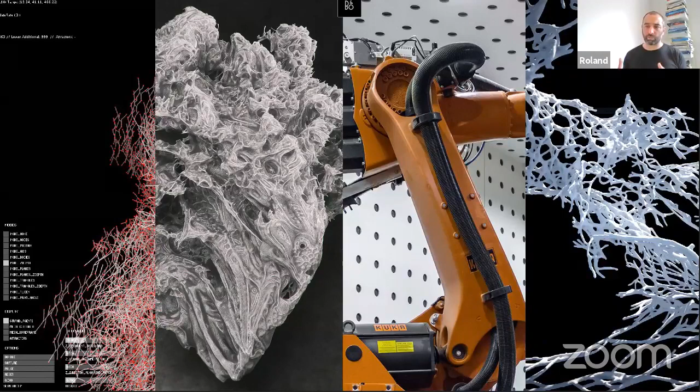The third thing I'm going to discuss is advanced manufacturing, specifically around robotics and the way we're using robotics in order to build some of the more complex geometries we've been working on. And lastly, looking at tectonics. What I'll be doing today is going through a whole series of projects that describe an evolution of tectonics. And when I'm talking about tectonics, what I'm talking about is a relationship between structure, surface, ornament, and their constructional logic, where all these things are intertwined.

So I've developed this work over a number of different modes of practice. The first of these, Kokkugia, we founded in 2004, and this was with two partners, Jonathan Podborsek and Rob Stuart-Smith. Kokkugia was really set up to explore algorithmic processes and try to understand how complex systems could be applied to architecture, and what that means for aesthetics and for articulation. This practice ran for about 10 years, and it was very much about doing highly speculative research.

The second mode of practice began in 2012, when I moved from the US back to Australia and established a laboratory at RMIT University, which is now called the Tectonic Formation Lab. This was really looking at the way we could use robots in order to build some of the complex geometries we've been working on. I guess at this point in our research, we realized that the things we were designing weren't possible to build in the current construction paradigm. And so consequently, we needed to explore other ways of building.

And so we've looked primarily at robots for that. And then lastly is Studio Roland Snooks, which is, I guess, in some ways a more traditional architecture practice. This is a practice which is trying to work through live projects and clients, and to try and take some of the innovations that have been developed at RMIT in the lab and previously with Kokkugia, and take those innovations and try to find ways of realizing those in real buildings. And we end up collaborating with many architects as well.

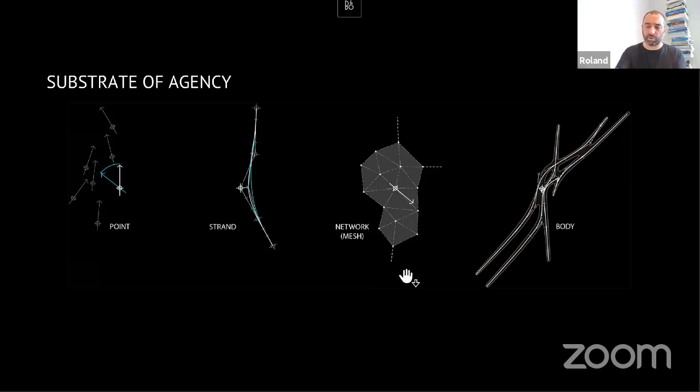And so the idea is that these agent bodies will swarm around and move around based on one set of rules, but then also connect to their neighbors. And these limbs will sort of reach out and make connections. Often we do this because we're interested in making continuous lines of structure or generating certain ornamental effects. So in this relatively subtle animation, you can start to see how all these limbs begin to subtly move in order to connect and make these continuous structural conditions.

Now, this type of algorithm ends up generating a geometry which is not really surface or volume or lattice, but somewhere in between. It's sort of a thick, fibrous mass. And these are the types of geometries we're really interested in making and understanding how we can fabricate them and how we can make them architectural.

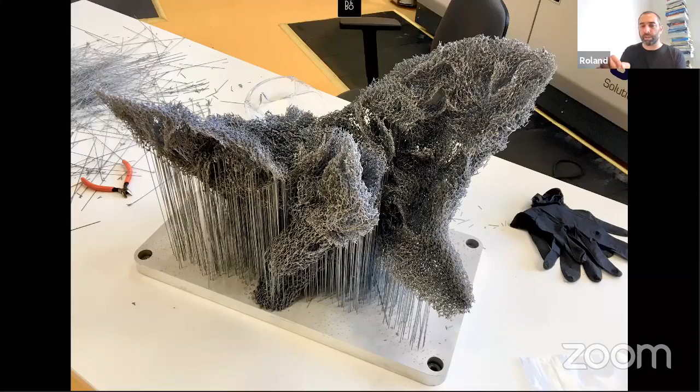Now, at a small scale, we can fabricate them directly. So this is an aluminium print. It's only about 600 millimeters across. It's relatively small, but it's incredibly intricate. This has 1.1 million agents in the model, and the member size is very small. So each of these members is about 0.4 of a millimeter, so less than half a millimeter in diameter. And so we're able to make this incredibly detailed and complex, intricate geometry.

So this is a project we developed for the Pompidou Center for an exhibition called Coder le Monde about 2 years ago. And it has a whole series of different conditions. The edges are a frayed condition. There's more turbulent conditions under the wings of the project. And then you have different readings at different scales. As you start to zoom out, you take on a very different reading as to when you zoomed in. So this is it in the exhibition at the Pompidou Center, and it's now become part of the permanent collection of the Pompidou.

This project was part of a series of projects. Another related project is this RMIT ceremonial mace. So this is an object which is actually used in graduation ceremonies at the university. And we were asked to really try and embody the agenda or the ambitions of the university, which is really around innovative design and technology and the way those things would come together to make a symbol for the university.

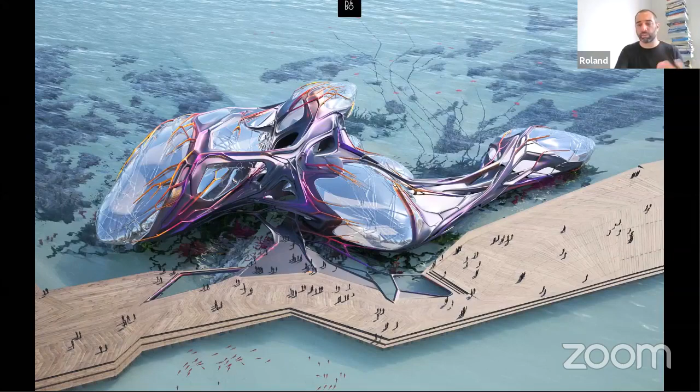This is an older project that we developed with Tom Wiscombe, a well-known architect in Los Angeles. And in this project, we were really trying to hybridize between generative processes and top-down modeling processes. And this became something we described as a sort of strange feedback between the two, where we would model something and then put it into an algorithm and generate something from it and then remodel it, et cetera, until we created a sort of sympathy between those things.

And one of the results of that is something we describe as a polyscalar geometry. And this is a geometry in which the same type of geometry reoccurs at different scales and has different roles. So these types of strands in this project, on the one scale, they're used for form and for spatial organization. Another scale, they're structural. Another scale, they're ornamental. So what happens is there's a blurring between types of geometry and what the actual geometry does. And this is something that's increasingly important in our work.

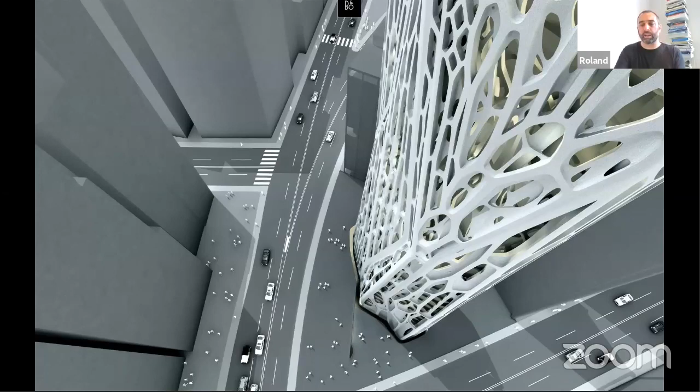We've also looked at these strand-based geometries as ways of making exoskeletons for towers. We have a series of these studies where we were looking at how we could have a load-bearing external shell for a building, so we avoid the need for columns. And this was an attempt to try and take a single piece of geometry, in this case the shell, and have it negotiate between a whole series of different architectural roles or behaviors.

And so in this case, this shell is structural. It's also the facade and the skin of the building. At certain points, it swells up and becomes spatial and habitable. Perhaps if it went down to a final level of detail, you'd also describe it as being ornamental. And we're interested in this idea that you don't have a single piece of geometry that represents an architectural role. So there's not a column that takes vertical load, or a facade that becomes the skin of the building. But we're interested in how one piece of geometry can do all of those things potentially.

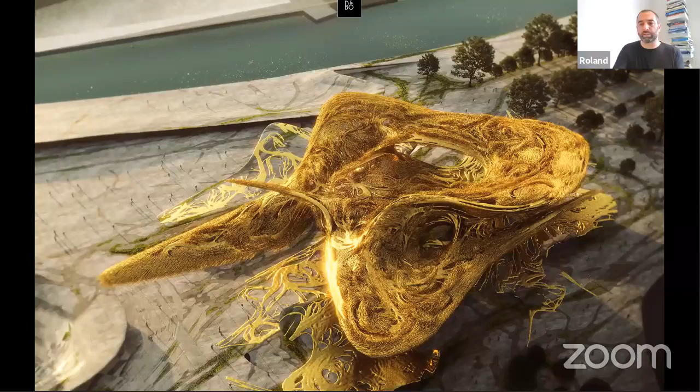We've also worked a lot on fibrous geometries and the way they're expressive, like this project in Kazakhstan, or this ornamental study for a ceiling in Warsaw. And in this type of project, we're interested in the way you start with a field of geometry, and from that field, some type of figure emerges. And through that process of emergence, a whole series of different characteristics emerge.

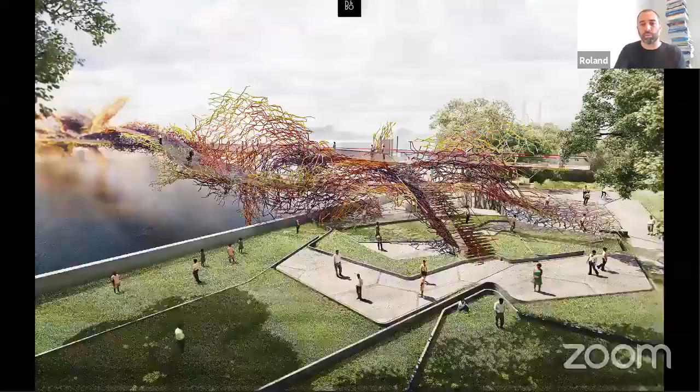So we have these sort of singular wing-like elements. At certain points, we have periodic repeating geometries. And as you zoom in, we see things such as this near symmetry. Now, none of these conditions are written as code. They're not part of the algorithm. These are all emergent outcomes from the interaction of the agents within the algorithm. And then we look at the way these fibrous geometries might scale up to architectural or sort of infrastructure projects such as this bridge.

Another concern we have is around mute forms. We're interested in forms that we import from elsewhere, in this case, taking these sort of geological or rock-like forms as a way of trying to undermine typical architectural articulation or formal languages. And so this is a project that we've recently built at RMIT University for a small meeting room that's made from fiber composites. So it's made from predominantly glass fiber.

And we've also looked at this in the practice where we're looking at these types of mute forms and what the relationship between form and articulation is. So in this image, you can see how we're blurring between what is an actual formal move and then what is a move of coloration. So at a certain point as you move around this space, these colored patterns of the skins of these objects start to align and imply three-dimensional objects.

And you sort of see how those three-dimensional objects carve in and sometimes Boolean from the objects and make these spaces, and sometimes just mark it and create coloration. And so look at this as a way of sculpting space. And in one of these, so this was a research lab we were developing at Monash University, and inside one of those pavilions is a sound recording studio.

And in this sound recording studio, we milled custom foam for the sound attenuation in this. And this was using a reaction diffusion algorithm. So it was a way of generating that form and then milling that directly from acoustic foam. You can see some of the detail of that.

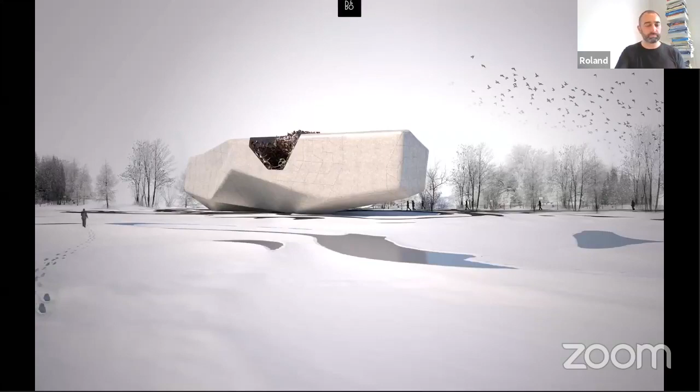So this relationship between mute forms, these sort of boulder-like forms, and the highly articulated skins is something we've been developing for a while. This is a project back from 2010, memorial and museum at Babi Yar, so a Holocaust memorial, where we're trying to make, I guess, a dichotomy between those sort of very heavy exterior and then this sort of very intricate, intense interior space. And the way it sits on a landscape that's seen as a charged landscape rather than a neutral landscape.

So if that's our interest in form, you can see a lot of the things we're developing really resist being fabricated from normative construction processes. It's not the type of thing you can take to a conventional construction company and ask them to build. And so we began to realize, as I was explaining, that we needed to find other ways of building. And so we established a robotics lab at RMIT University.

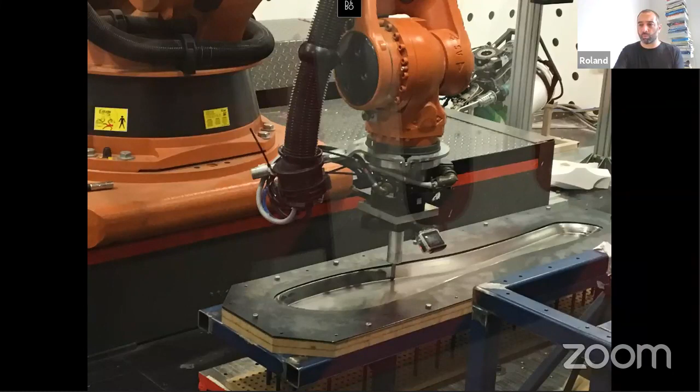And initially, we looked at a whole lot of different ways of using robots to build things and to fabricate. We looked at the way we could use robots to bend rods. We looked at using robots to form sheet material. So in this case, we're incrementally sheet forming titanium. So the robot's sort of pushing into metal to create a form without using a mold.

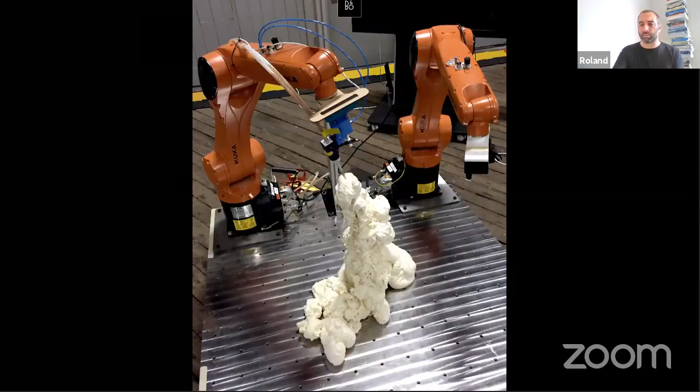A lot of our work has involved feedback. And so we are often using cameras and scanning and taking real-time information back to the robots, and they're responding to what they see. And so this allows us to respond to highly volatile materials. So in this case, the robots are spraying out expanding foam. So it's a very sort of ugly and volatile material. But as it's doing it, it's scanning it, it's understanding what that material is doing and responding in real time.

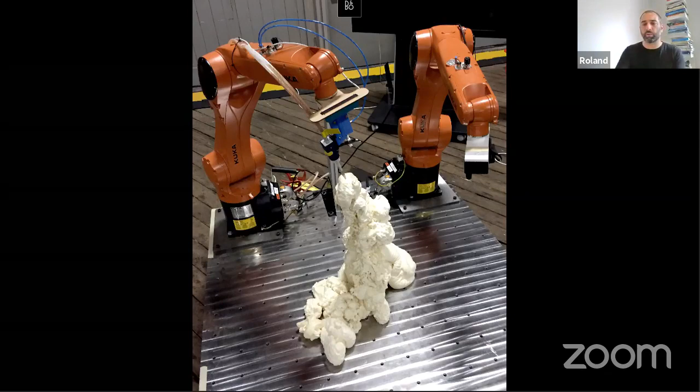So it's a conceptual project where we're looking at this idea of, instead of designing something and then fabricating it, the design and fabrication happens at once. So it's all part of a real-time process, where you have an interaction between material and algorithm through the logic of real-time robotics.

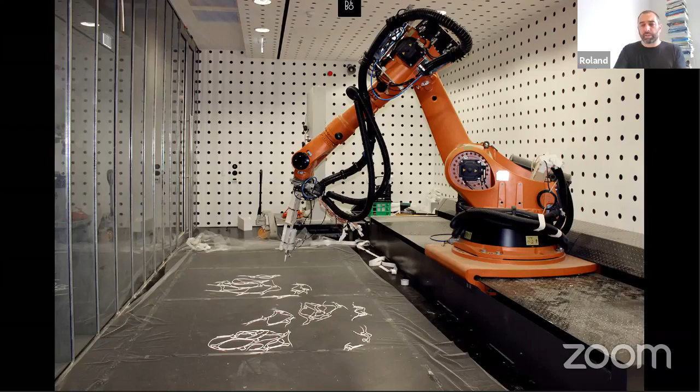Early on in our robotics setup, we also did a lot of work with developing our own extruders, different custom extruders, and we've also looked at the way you extrude nutrients and respond in a slow robotics way to biological growth. So this is an example where a robot is basically tending to the growth of mycelium and reacting as it grows slowly.

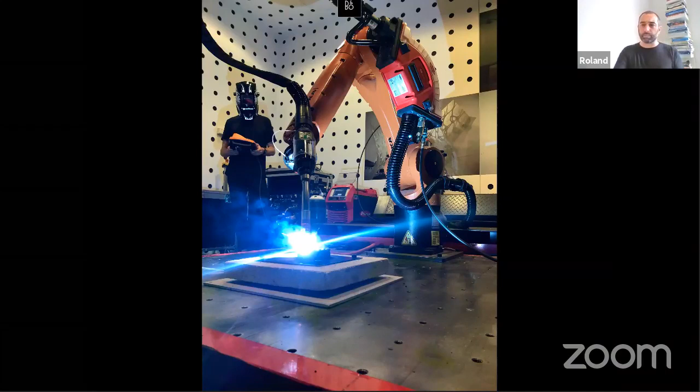And some of our most recent work is looking at additive manufacturing, large-scale additive manufacturing, using a process called wire arc additive manufacturing. And this is basically, crudely, you could describe it as having a welding torch, a MIG welding torch on the end of a robot, which deposits down layer after layer of material. And so we've looked at using this as a way of developing these type of wireframes through almost like spot welding, as well as developing a layer by layer, more traditional 3D printing approach.

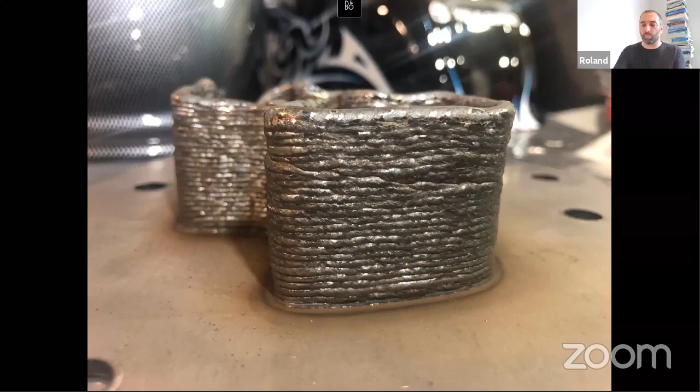So this is being printed, this is printed in steel. It's quite a rapid process. And then in this example, you can see in this printed cylinder, we've then come back and we've machined the outside of it. And that demonstrates the way this makes something which is entirely homogeneous. So it's a process in which you can either express the layer by layer, slightly rough articulation of it, or you can come back and machine it later and get a highly polished finish.

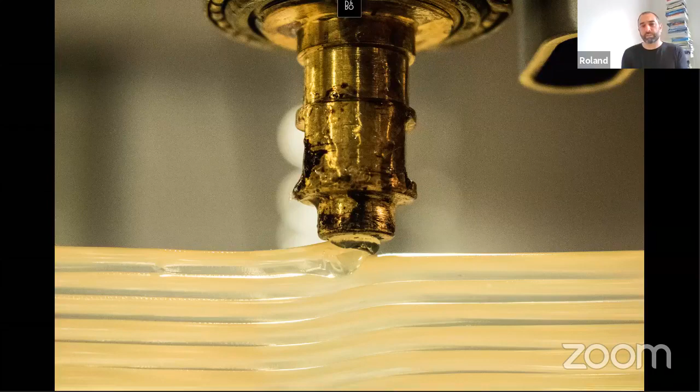And so this is something we've been working on in terms of testing some of the agent body geometries we've been working on and seeing how we could print those things directly in steel. But a lot of the work we've done over the last sort of 6 or 7 years now is really around large-scale 3D printing of plastics.

And of course, many of you have used small 3D printers to print perhaps architectural models. We're interested in the idea of perhaps we can scale this up and start to actually print parts of architectural buildings, parts of building components. And so this is our large-scale FDM 3D printing facility at RMIT.

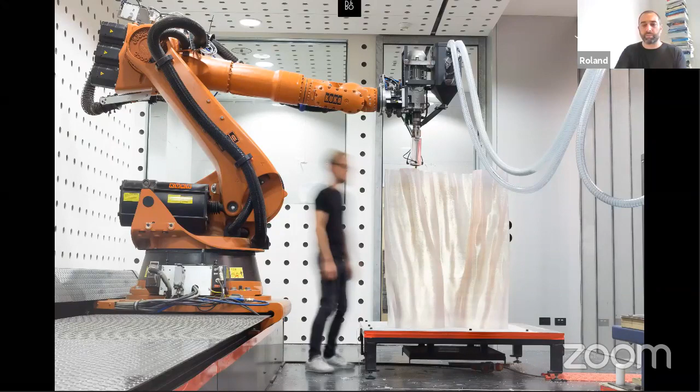And about three and a half years ago now, we completed our first 3D printed part of a building that had to go through fire codes and building codes and get signed off by the government. And this is part of that research lab I was showing earlier. And it's 3D printed in polycarbonate. It's printed in 10 panels. And this is to enclose a small meeting room.

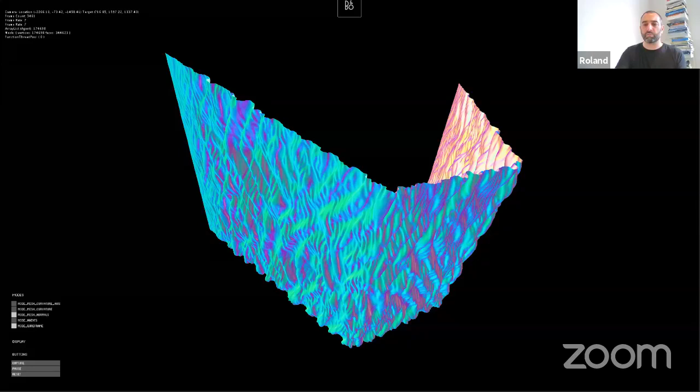And it was generated through an algorithmic process in which we take a surface, and each of the vertices of that surface is an agent. And as they start to interact with each other, they make these sort of wave-like or corrugation patterns. And you can see in this, there are two scales of corrugation. So a large corrugation, which is structural, and a smaller corrugation, which is really used for, I guess, micro stiffening, but more so to create certain optical effects in terms of reflection and refraction of light.

So that project led to a more recent project, which was similar in brief. We were asked to design a couple of studios that fit into a larger workshop and making space. And we're trying to create a relationship between those two studios where we have different levels of transparency between them. And so part of these studios are from solid material, part is glazing, and part is 3D printed translucent plastic. But what we were trying to do is create a relationship between them.

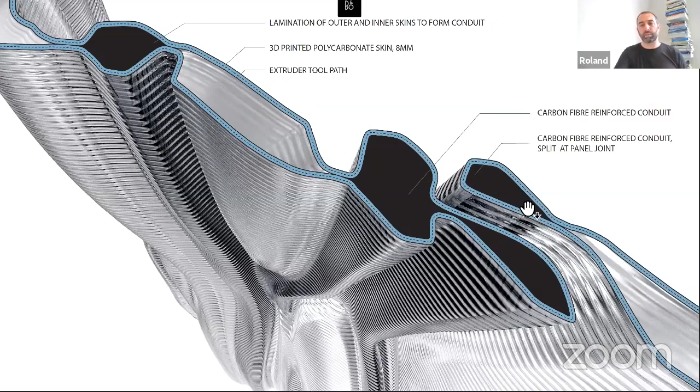So the same panel divisions in the solid material become mullions in the glazing, and then become reinforcing elements in the 3D printed panels. So this was originally designed to have carbon fiber reinforced ribs within it, so we could print with a relatively thin plastic and reinforce it with something which is structurally strong. And those ribs then also form the joints between the various panels. Now, in the end, for various value management reasons and the politics of the project, the carbon fiber was removed, and so we ended up printing it slightly thicker. But those ridges still remained as structural elements within the 3D printed panels.

And so this was the first time when we didn't print one of the projects ourselves. What we actually did is looked at the way we could license our technology that we developed to a company in Australia who were then able to print this commercially for us. And this is an important step we see as a way of getting this work out of the research lab and actually into real building construction where architects can use these processes and these fabrication techniques. And as you can see here, there's various different layering between these two spaces, and the way you look from one through another through these different levels of translucency.

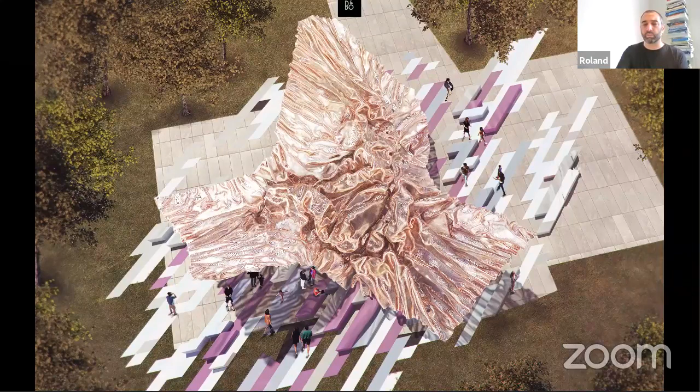There's also been a series of unbuilt projects that looked at similar strategies, looked at these types of algorithms which fold and crumple the surface to give it structural strength, and look at this expressive capacity of this type of 3D printing.

Okay, so that brings me to the fourth topic, and I guess the focus of this presentation, which is around tectonics. Now, as I said, I really define tectonics as the relationship between surface, structure and ornament, and its relationship to modes of production or fabrication approaches, and modes of connectivity, the way parts connect to each other.

And I guess this fascination in tectonics really came about with this image. This is an image we produced about 8 or 9 years ago. It was for a competition. And I guess after producing this, this is the moment we realized this image couldn't be built in conventional manufacturing processes. So we needed to find other ways of building it.

And so I guess we embarked on a whole series of prototypes. Often these prototypes are gallery scale. They're things we put in exhibitions. And each one of them, we were trying to test a different way of producing that type of geometry, a different way of embedding structure and ornament and surface all into one cohesive element.

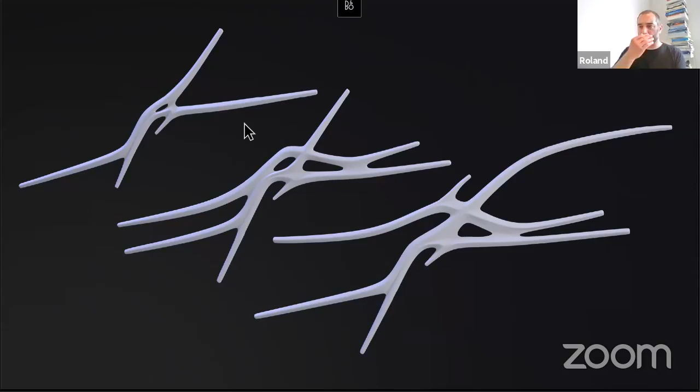And the way it was produced is we had 3 different body types, and these were cast in flexible polyurethane foam. And so those bodies could bend. They're very flexible, they're floppy, but they couldn't actually stretch. And so then we had to take that logic and build that back into the generative algorithm. So we knew that whatever was generated algorithmically could also be built.

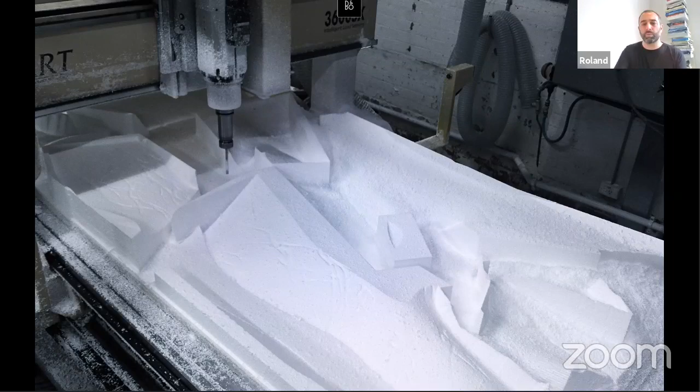Doing this type of fabrication in fiberglass, when this is done in the boat industry, for example, it's typically built on a mold. And so we milled a polystyrene mold, coated that in resin, and then had layers of fiberglass fabric. We then placed these flexible foam agent bodies into the grooves that had been milled into the surface of the mold, laid more fiberglass over the top of it, and then it gets vacuum bagged and resin infused.

So basically we draw resin in under vacuum, and this makes a very strong, very thin fiberglass surface and bonds everything together. And so in this case, the fiberglass is less than a millimeter thick. It's 0.85 of a millimeter. So it's very thin, and it enables this structure, which is 2.5 meters tall, to be rigid.

And so it's a strategy where we take 2 very flexible things, a very, very thin fiberglass surface, and these floppy polyurethane foam bodies. But when those 2 bits of geometry, 2 materials come together, they create something that's very rigid, and they do that through geometry rather than material. And the way that works is that each of these agent bodies has a certain thickness to it. It's only about 1 centimeter, but that's more than 10 times as thick as the actual surface itself.

And that structural depth creates something which is strong, creates a sort of sandwich panel. And also the corrugations it generates also give the surface strength. And so you can see this is why it's important that we have these continuous connections between the bodies, because we want these continuous structural ribs to run through the surface. Now that was a very small project, only 2.5 meters tall.

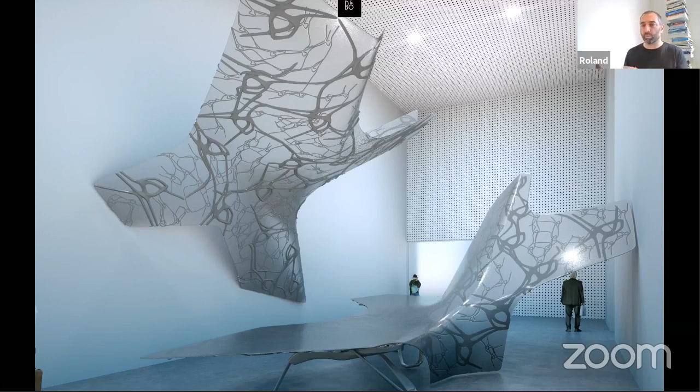So this is one of our last digital models before we started rationalizing the project. And one of the things we realized is that with the previous project, we could mill the mold for the entire project. It was only 7 square meters. But with this project, it was 10 times the size, 70 square meters. We couldn't mill that much mold. So we had to work out how could we use some type of reusable mold and rationalize the surface.

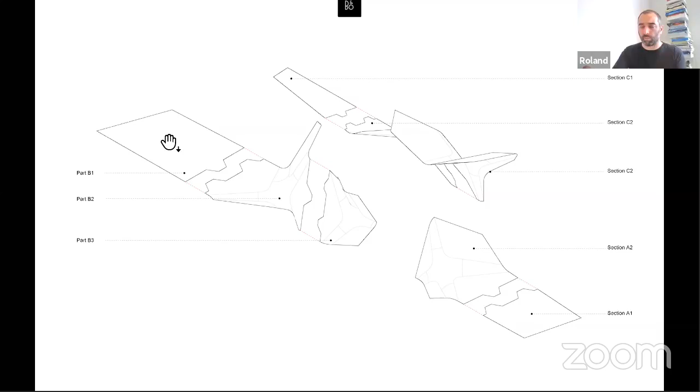So we started by doing a series of prototypes, trying to figure out the local articulation of this, the way these agent bodies would fit at a couple of different scales. And then at a larger scale, trying to understand how we could economize on form in a certain way. So in the end, we made the project from 8 parts. 3 of them are flat, so they didn't require a mold, and the other 5 are curved, but they all come off the one mold.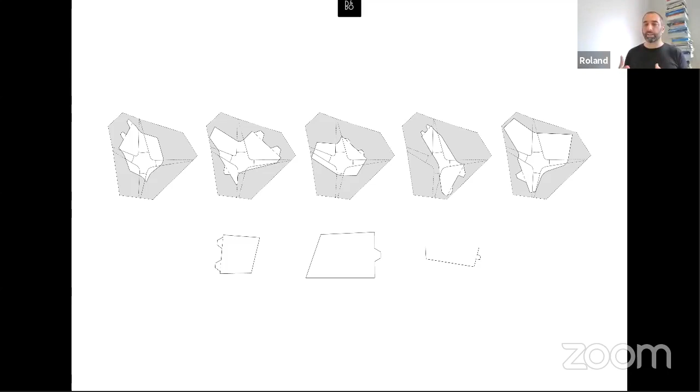So this gray shape is a plan view of the mold that we used, and you can see that each of those panels has a different profile cut off that mold. So it allows a certain continuity of form. So each of these have obviously very similar surface form, but because they're cut in different ways, they sort of undermine the repetition of that. So you don't see the visual repetition, but you get this consistency of formal character.

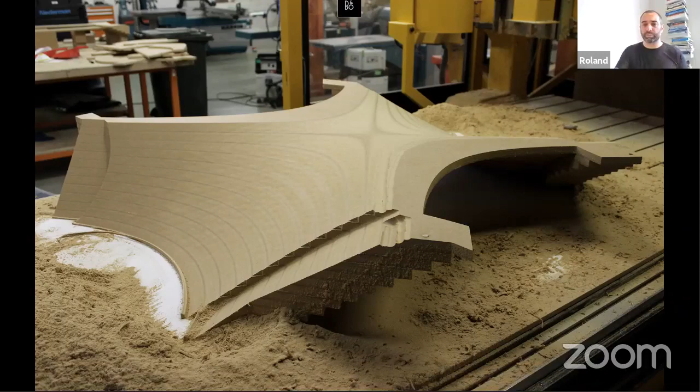So to make a reusable mold, we couldn't use foam, so we looked at the way we could mill from MDF. And so we made a mold that was partly CNC produced. So this central part is about 1.5 meters across. But this becomes part of a much larger mold, which is made partly by hand by carpenters, and as you can see, partly by machine through milling. In a way, the mold itself is a small architectural project. It's 5 meters by 6 meters by 3 meters tall.

The articulation of this project has 2 scales of agent body inlay. So the large scale is made from milled foam and the small scale from extruded silicone. Now, because we weren't actually building this ourselves, we had a boat builder to make this, we knew that we couldn't just give them a whole series of flexible bodies and have them work out where they go. We actually needed to make the foam rigid so they could place these fairly large rigid pieces of foam onto the mold where we could have a drawing for it.

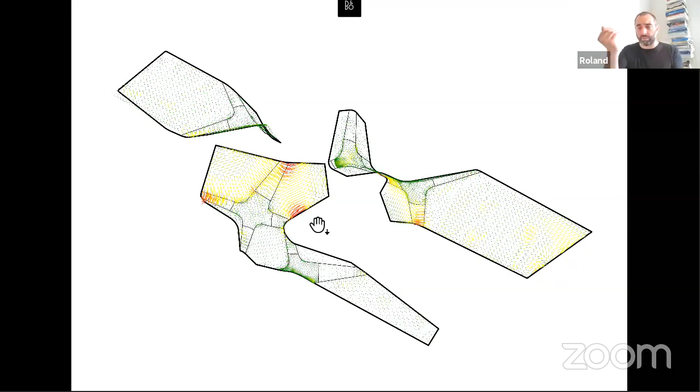And each of these bodies was responding to the structural analysis of the surface. So this is a bending moment diagram, looking at the way the surface wants to bend. And these agents were programmed to be able to respond to that so they could resist those bending moments. And what they're trying to do is align their limbs in the direction of the bending moment force, and also to scale the size based on the relative load each of them have.

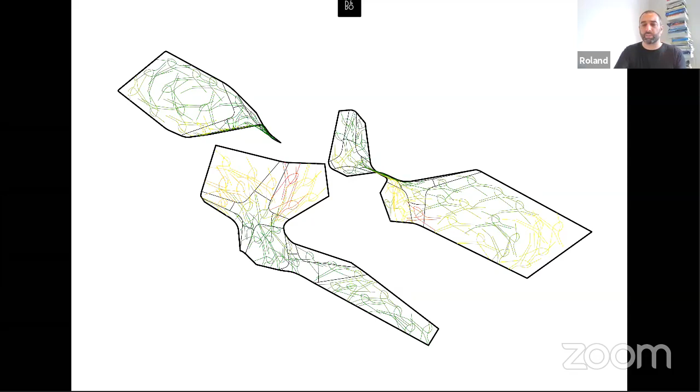Because we had to make all of these unique, we couldn't cast them like we did from a mold in the previous project. We needed to mill each of these bodies. So some of them were quite complex. Some of them which would involve double curvature meant we had to mill a jig, we had to mill the backside, then we had to mill the front side. So this was quite an involved process.

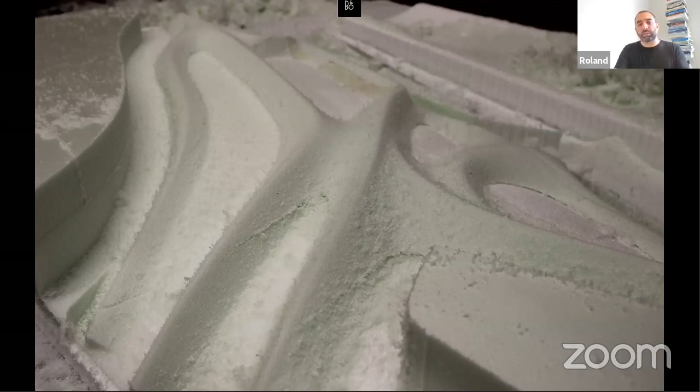And then once each of those milled parts were produced, they get laid down on a one-to-one template, a drawing that's on the mold, and then they are sandwiched between layers of fiberglass. So this is quite a difficult process, both in terms of the milling and fabrication of the parts, but also compositing it all together as fiberglass. So you can see here that those then get trimmed, and we designed the parts to be as large as we could fit onto the semi-trailer.

Now that was a very difficult project to fabricate. And so after doing that project, we realized that we needed to find simpler ways of building these types of geometries. And so we started to wonder whether or not we could build these geometries simply from flat sheet material.

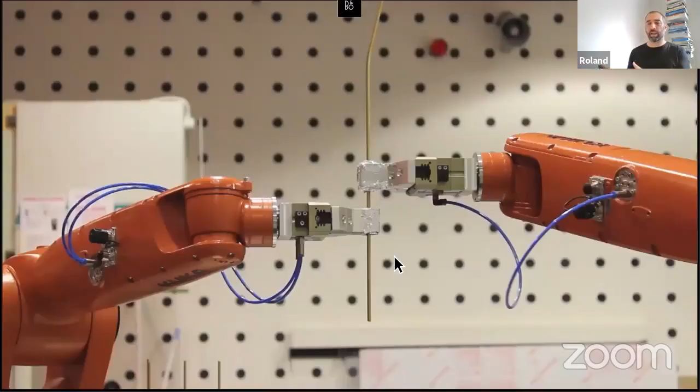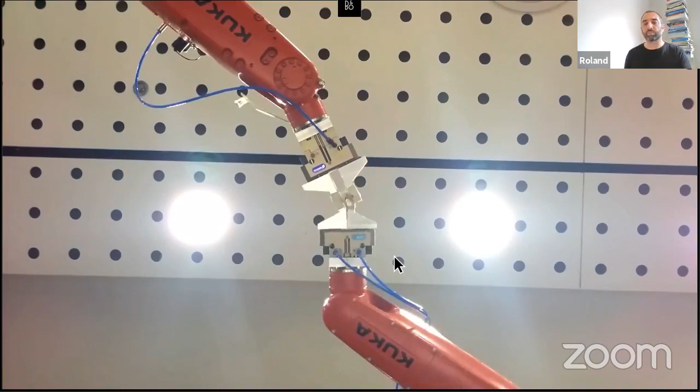And so what we did is we did a series of experiments with the way robots would bend metal rods. What is the distance between bends, maximum angles, etc. And then we programmed that back into our algorithm, knowing then that whatever the algorithm generated through this very volatile process, we knew would be inherently something that could be fabricated.

So one of the things, though, we realized by doing that is we fabricated this in a very efficient fashion. We had 270 metal rods, about 1 meter long each, with typically about 5 or 6 bends in them. And the two robots could fabricate all of those in one day. But then it took 5 days and 5 people to assemble this and to weld it together.

And we realized that it was really about the translation of information from the digital model to people who are assembling this. That was the real stumbling block. That was the thing that was slowing down the process. And I guess in a way, we realized we optimized the wrong thing. We ended up optimizing the fabrication where we probably should have optimized the assembly logic.

Now, after doing that project, we looked at trying to scale that project up. So we effectively used larger rods, in this case aluminium, and larger robots, and developed a pavilion along similar lines, a similar logic, at Tongji University in Shanghai as part of their Digital Futures initiative there.

But I guess those two types of research we're doing, one around the thin surface and one around the lattice or the thick fibrous mass, they each had opposite problems. So the surface had no thickness and then the lattice had no surface. And so we realized we needed to bring those two things together. And so really this became a key project. This was developed about 5 or 6 years ago.

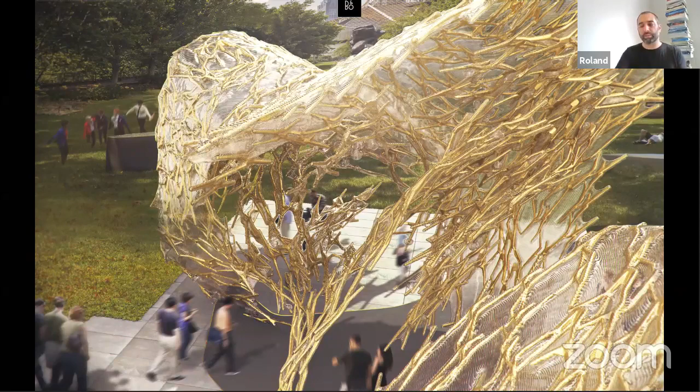And so in the end, we had an agent-based algorithm that was responding to a geological form that we had modeled. And so at one part, it's really sort of adhering to the surface of that. At other parts, it starts to unravel and make these more turbulent spaces and fibrous spaces on the interior. And so you see in the section that it maintains both of these conditions. It has a surface at one point, and it has a sort of thick three-dimensional fibrous lattice at another point.

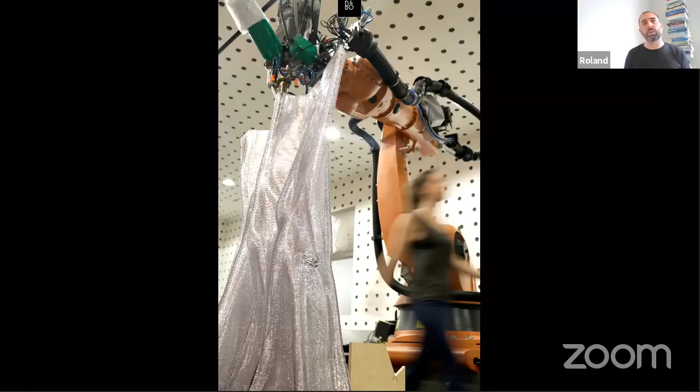But we realized to be able to make this, we couldn't rely on the same techniques we had been, which was effectively trying to build the agent bodies in some way, and then to try and apply some type of surface. And instead, we realized that if we flipped that logic, maybe it would open up a whole lot of other possibilities. And so we thought, okay, instead of building the network and skinning it, what about if we built the skin and then cast the structural network into the skin? And so this is where we became interested in additive manufacturing and 3D printing.

And so we developed a process in which we could print these thin skins with a series of conduits embedded into it, and then we could start to cast material back into them. And the idea was to be able to cast, in this case, a fiber reinforced concrete lattice back into this, and that enabled us to have this very intricate, complex structure. And so we developed this through a series of prototypes. You can see here where we're casting concrete into those thin skins. This is something that was then tested through a series of projects, both sort of digital projects as well as prototypes.

A year or two after doing that project, we were asked by the National Gallery of Victoria to try and scale up what we were doing into a large pavilion to go as part of their triennial exhibition. And so we developed this project, which is called Flow. And this is a collaboration with a sound artist called Philip Samartzis. And so you can see that the project is 3D printed out of plastic once again. And Philip Samartzis is a sound artist. He takes recordings from the Antarctic of melting ice and glaciers cracking and forming.

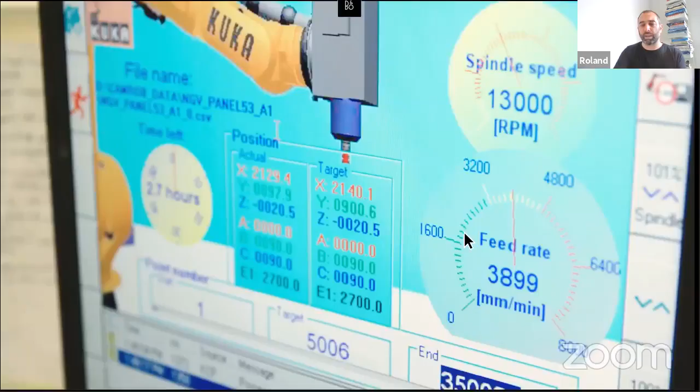And so this project is developed through a swarm of 70 3D printed polymer panels. And so these panels were printed at RMIT, and it takes about 4 hours to print each of these panels. And they're almost like a family of parametric panels. So each one has a unique form, but they're all related in terms of their geometry. And each one also has a different level of translucency and glossiness. So some of them are high gloss and quite transparent, and then some are quite frosted. And we became quite interested in the lighting effects, the reflection and refraction of light through these panels.

But I guess a key issue of this project was the relationship between skin and structure. So I've talked a lot today about how we were attempting to compress surface and structure and ornament into one continuous thing, and the way we were trying to skin these agent body networks, or we were trying to cast them back into 3D prints. Whereas in this project, we didn't have that opportunity, partly for a very pragmatic reason. We were given a very short period of time, only 3 months, from the start of design to the end of construction on this project. And so, because of the very short design time, the brilliant engineers we worked with, Bollinger Grohmann, weren't able to engineer a plastic structure. They were only willing to engineer metal.

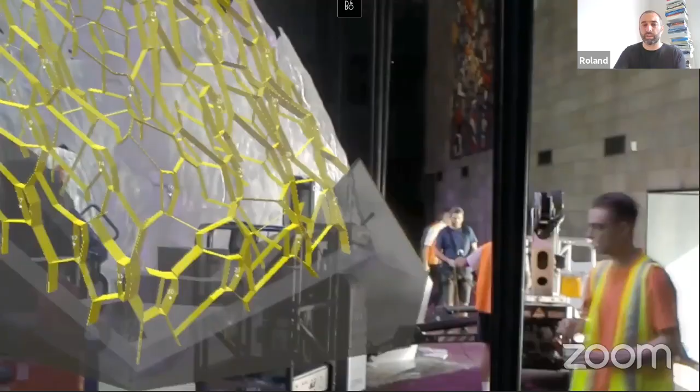And so we asked whether we could trial what they were working on with the HoloLens as a way of assembling this project on site without any drawings, and whether we could use that as a way of speeding up the process. So basically, this is when we're assembling. This is what we're looking at. We're looking at a holographic model of the project in real space as we're assembling it.

And there's a short video that the guys at Fologram put together, and this is showing the installation team. And you can see these guys can see the digital model, and so with each part they pick up, they look at the digital model. It has a label for each part on the digital model. Then they go and get that part. It's labeled. They bring it in. They sort of rotate it until it fits the digital model, and then they bolt it together.

And so this became a process in which we didn't need to constantly refer back to digital drawings like we did with the bent metal rods, and allowed us to assemble this project remarkably quickly, considering it was quite an experimental and complex project. So this is the assembly sequence. And you can see that the panels are going up with the bits of steel. So basically what we do is we assemble the steel and the plastic together, and then those things come up as a complete unit.

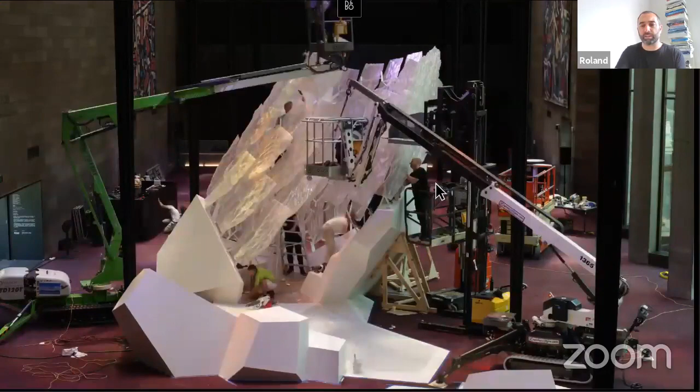And this was sort of finished just in time. You can see that the painters are just finishing as the opening happens, and I guess the audience comes through. This was a very popular exhibition. In the end, about 85,000 people visited this project in the first 10 days that it was open. So that put a lot of stress on the project. It meant that it's not a project that could be running late or over schedule.

So I guess my criticism of that project is, as I was saying, the way that the structure and the skin were two different things, and we tried to align them as closely as possible, but they're still discrete and separate. And so since then, we've been working on ways of trying to get structure and skin to be more integrated. And so our first attempt was these studies. This was a project we were working on in Portugal that went on hold, and this was where we were trying to embed the steel within layers of 3D printed plastics.

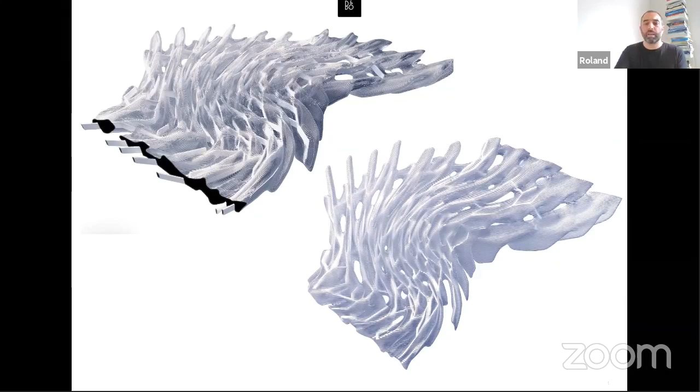That also caused a whole series of problems. That's not a particularly easy thing to do. And then we went back to our previous work and said, well, maybe we could actually cast into it. Instead of casting concrete in, maybe we could cast carbon fiber. So this is where we start to tie it back to the carbon fiber, the composite projects we were doing a number of years ago.

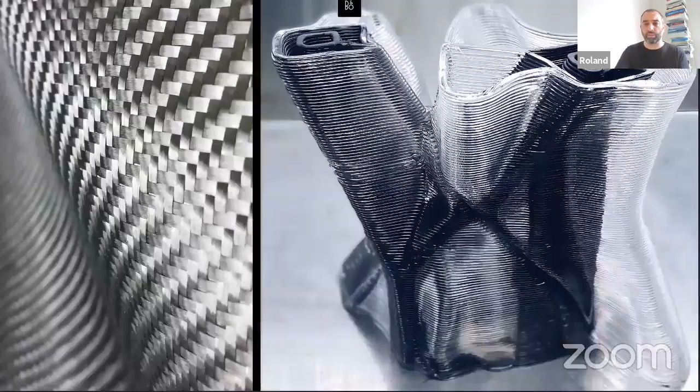And so we started working with the aerospace company Boeing, and Boeing sponsors part of our research to look at this relationship between carbon fiber and 3D printing. And so what we're doing is printing a series of layers, so sort of structures inside skins, and then having conduits in there where we could embed carbon fiber. And so this was developed for a project which we exhibited a year ago at the Shenzhen Biennale in China. It's quite a sculptural project, obviously.

But what we're trying to do is bring together a whole series of different things we've been working on now, I guess, over the last 18 years. And I really feel like this is the one project which starts to successfully bring those together. We're looking at this relationship between things which are surface-like, but also deep structural lattices. We're looking at integration of skin and structure, integration of high-performance carbon fiber with 3D printing of polymers, which of course gives us the flexibility for all of this type of geometric freedom, and bringing all these tectonic logics together, through the algorithmic design processes, into this one cohesive element.

So it's printed with 3 layers. It's not printed in simply horizontal layer by layer, but because of the complexity of the form, we've broken it down into a series of 13 parts, and each part is printed, some of them with horizontal layers, others the layers start to curve around, and that allows us to create greater overhangs and to have the geometry start to rotate through space. So this is back in our lab, printing one of those parts.

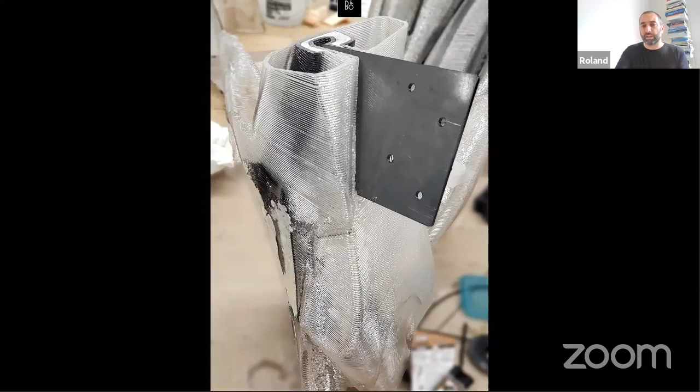And then once those parts are printed, it's manually cleaned, and then we infuse the carbon fiber into what we describe as a structural skeleton. And this becomes a combination of carbon fiber and cast polyurethane foam to give it structural rigidity. Then there's a whole lot of other details which are designed into that. So this is a series of steel plates that connect to it. This is one of the larger parts after it had the carbon fiber infused into it. Then these parts are being packaged up, crated up from where we fabricated them in Melbourne and sent to China, to Shanghai, to be installed.

So I guess that's the last project that I wanted to share with you today. What I'm trying to do throughout this presentation was to explain the way we looked at these 4 different research agendas, researching into algorithmic processes and multi-agent systems. This is something we've now been working on for 18 years, looking at the types of complex forms that leads to, and then the way we could use robotics and additive manufacturing as ways of building these complex forms. But then most importantly, tectonics. And the thing about each of those previous 3 elements, the algorithmic design, the formal studies, and the robotic fabrication, is that no one of those leads the rest of them. It becomes a negotiation between all of them.

So although we started with a problem that we'd invented for ourselves through digital design, once we started to actually work out how to build things, we started to work out the limits of material, the limits of robotics, and those things begin to inform what it is that we design. So I like to think this type of project really becomes a hybridization of all those things, where it's not led by one thing or another, but it's really in the true spirit of complexity, which is about the negotiation of a whole series of disparate ideas, disparate elements, which negotiate together to create one cohesive whole.